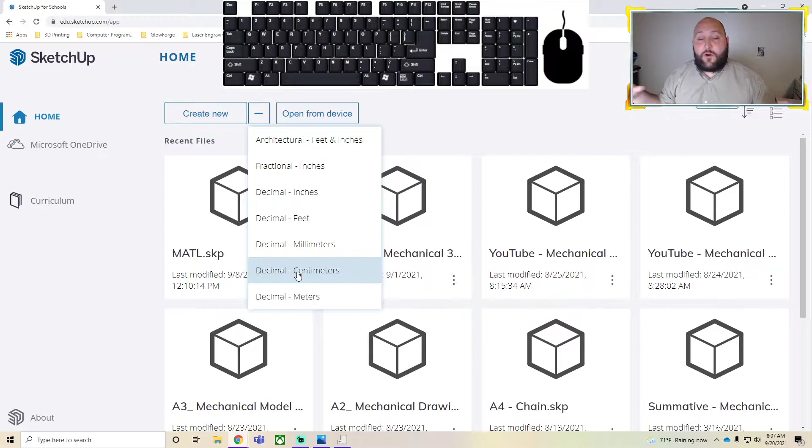All right, so if you make your way over to Google SketchUp, we're gonna go ahead and create new. For this one, again, I wanna use centimeters, just because on that object, the numbers are kind of big. If it was inches, 50 inches is 4 feet and something. So we don't want our part to be 4 foot big. So we're going to use centimeters on this. So click the little drop down here and then go to centimeters.

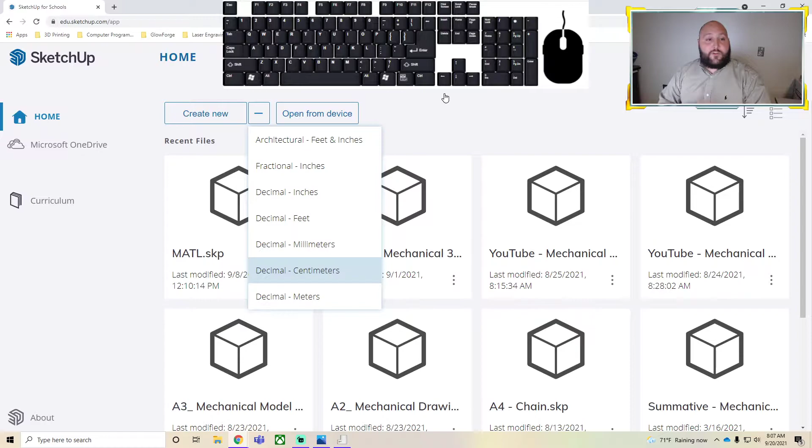Again, the link to Google SketchUp for Schools is on the It's Learning page. So you're going to click decimal centimeters. I also added a keyboard. That way y'all can see my button presses that I am doing and how I'm typing. Maybe that will help also.

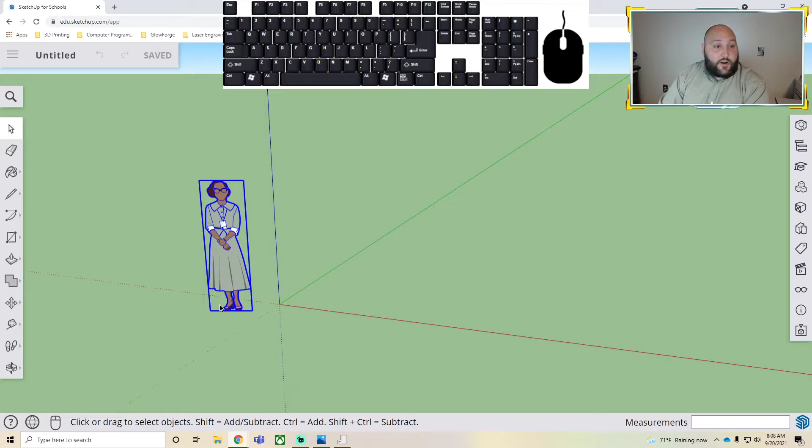All right, so they no longer have Temple Grandin. I haven't researched to see who this is yet, but we have a new avatar in the middle. So I'm going to go ahead and click on her and click delete. All right, so that way I have a nice work area here. First things first, you always want to save. So I'm going to go up and click Untitled, then go into my OneDrive,

and I'm going to call this YouTube SketchUp number 2, and this is our locating guide. YouTube SketchUp number 2 locating guide. All right, so now that it's saved, sometimes you'll get an error, guys. Just keep clicking save. It'll update in the cloud. All right. So we're going to take a look here.

So which way do we want to start? When we did the last one, we started with the rectangle bottom. But the thing that's different here is we do have a rectangle, but we also have this arched edge on the right side. So I'm going to start by drawing the rectangle first, and then I'm going to add that arch second. So rectangle first, arch second.

So I look here and I see that my rectangle is 65 long. And then how far across is it? Well, I know that the diameter of this circle is 25, but I also know that the radius of this big arch is 25. So I know that this is 50 across. So I need a rectangle that is 65 by 50. All right, so I'm going to come in here and I'm going to grab the rectangle tool.

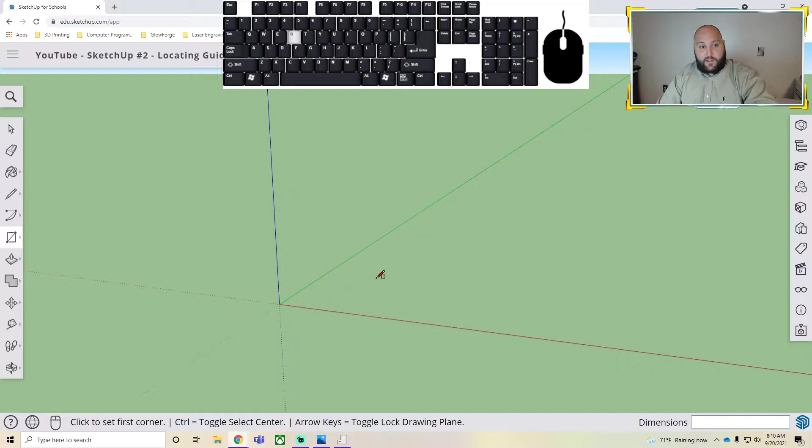The reason I'm including the keyboard is I'm going to teach you hotkeys today. So if I press R, you will see that now it's gone to the rectangle tool. Again, watch. I'm on my pointer. If I press R on the keyboard, I now have the rectangle tool. So I'm going to start by just drawing, and I want it to be 65, comma 50. Enter. And there's my rectangle.

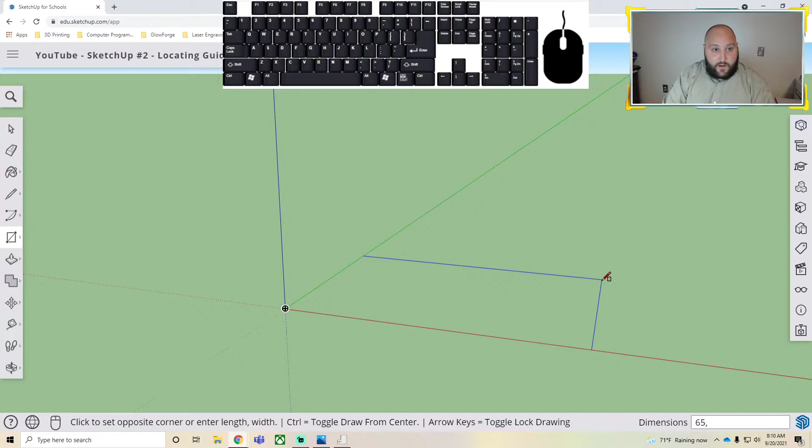So again, I start drawing the rectangle. I type in 65, comma 50. Enter, and I've got my rectangle. If you're not using a mouse, you'll have to go down here and grab your zoom tool.

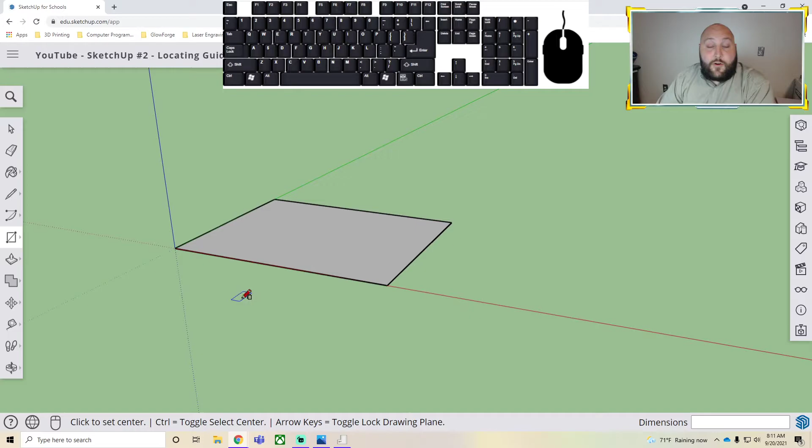All right, I like to use this zoom tool. Ooh. All right, but again, I have a mouse. So with the mouse, I can click, I can rotate, I can zoom. So if you don't have a mouse, you're gonna have to use these tools down here.

All right, so like I told you in the last video, as we work, I want you to dimension. So let's just double check. Okay, yeah, we got 65 by 50. What this will do is as you're working, you won't have these moments where you're like, okay, that's not what I wanted, because you're double checking yourself all the way through.

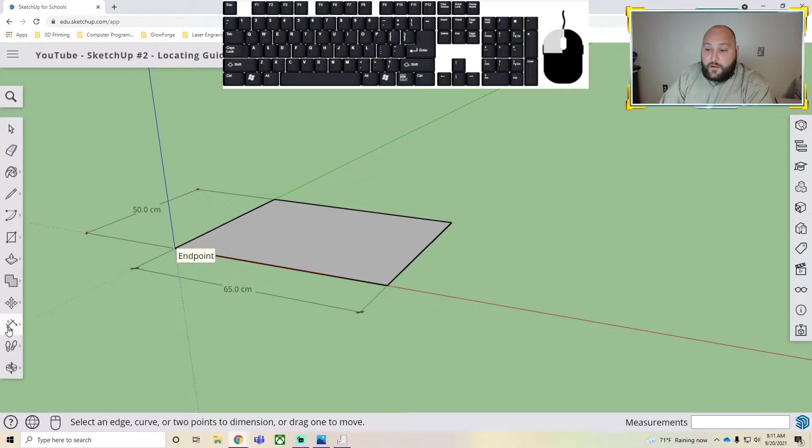All right, so next thing we want to do is add this arch here. So if I go back to my drawing, that arch is a 25 radius. So I need to find the middle and then create a circle that is 25. So I'm going to grab my tape measure tool to find the middle. Again, if I press T on the keyboard, T gives me the tape measure. Watch, T, tape measure tool.

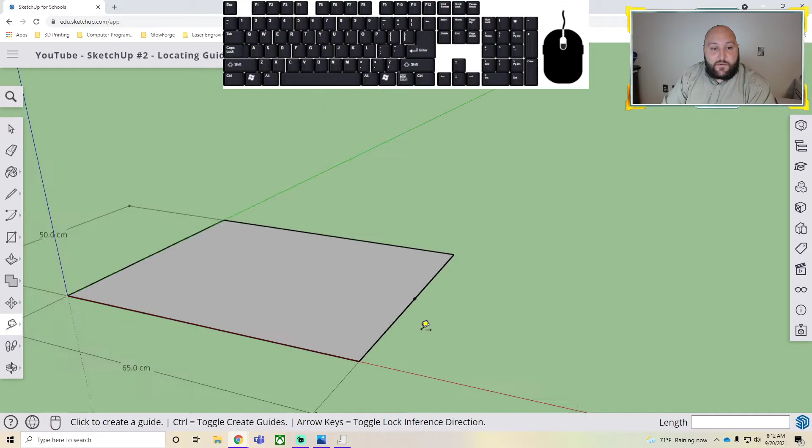You're going to click a corner and start going out. Okay, half of 50 is 25, so I'm going to click 25, enter. And now I have this little guide point right here at 25. So I'm going to use that guide point to create a circle. If you want to take a guess, what is the hotkey for circle? It is C. So now I've got my circle tool. I'm going to click on that midpoint I created, and I'm going to pull it out to the edge. And that's going to create our arc we need.

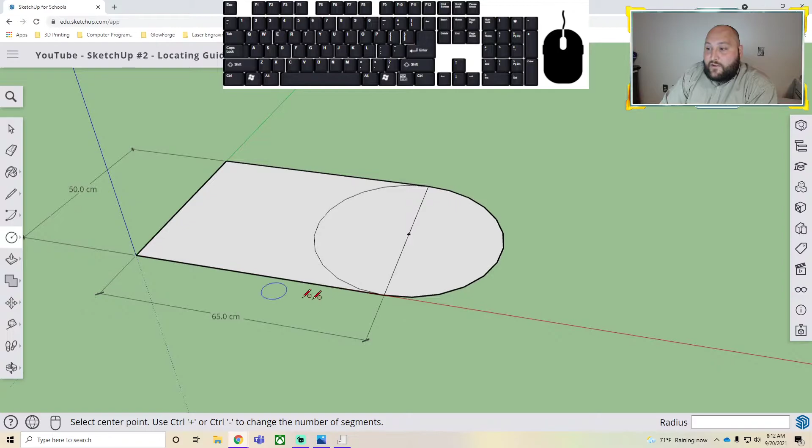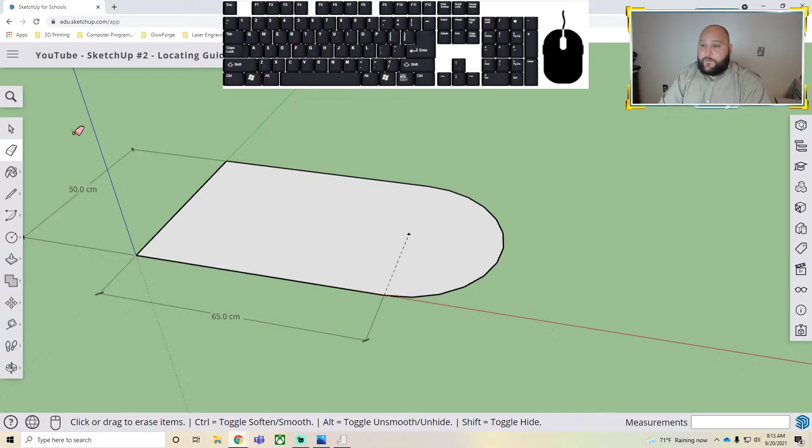I'm going to grab my eraser tool. So E, right? Probably E. I tapped E on the keyboard. Got my eraser tool, and I'm going to delete this line and this line. I'm going to leave that midpoint because we need to draw a circle and cut it later. So you actually have two ways to do this. You can draw the circle in now before you push pull, or you can draw it in later. It's really up to you.

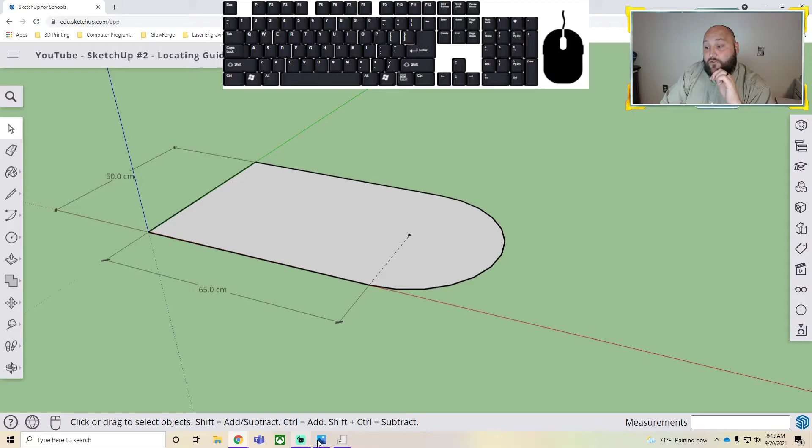All right, so what I'm going to do now is I'm going to go back and take a look at our drawing here. On our drawing, I think I'm going to go ahead and draw in that circle. So the diameter of that circle is 25, but SketchUp wants us to include the radius. So the radius is 12.5. Even though our diameter is 25, the radius is 12.5.

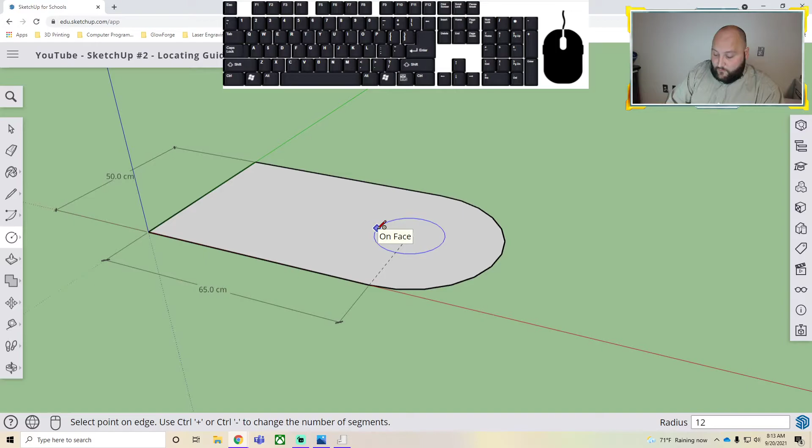So I'm going to take our circle tool, and I'm going to click that midpoint and see it at the bottom right there. You'll see that it says radius. So I'm going to type 12.5, enter. And that gave us a diameter of 25 because our radius was 12.5.

So how can I double check myself? I grab the dimension tool. I click it, diameter 25. That's what we wanted. Radius of this one should have been 25. All right, so everything's looking good here. So I'm going to go ahead and take my push-pull tool and add material, add depth to this model.

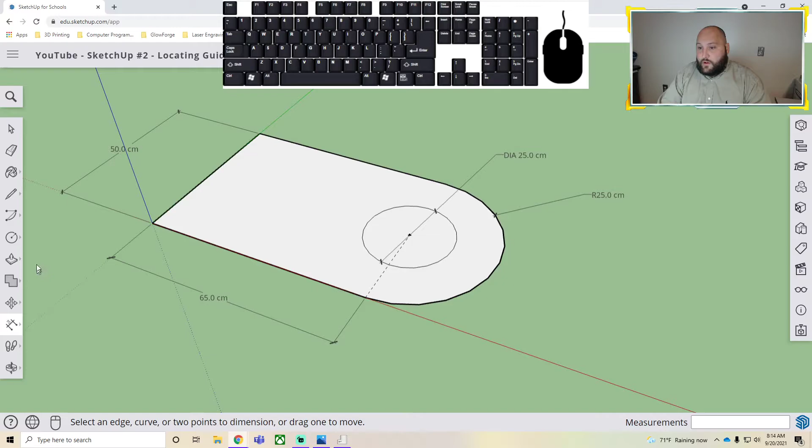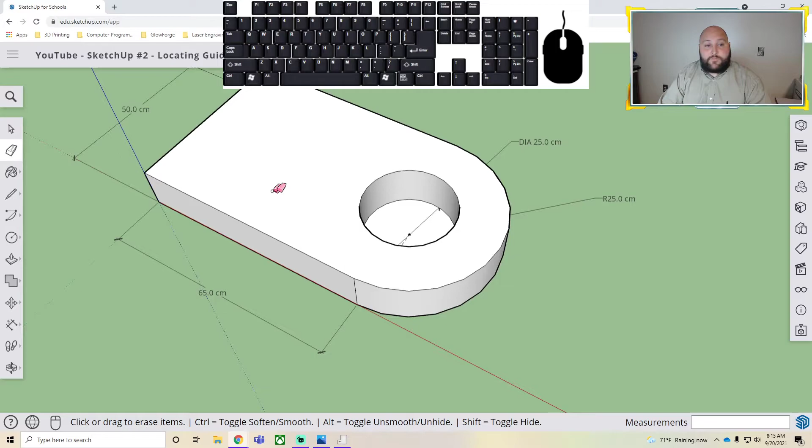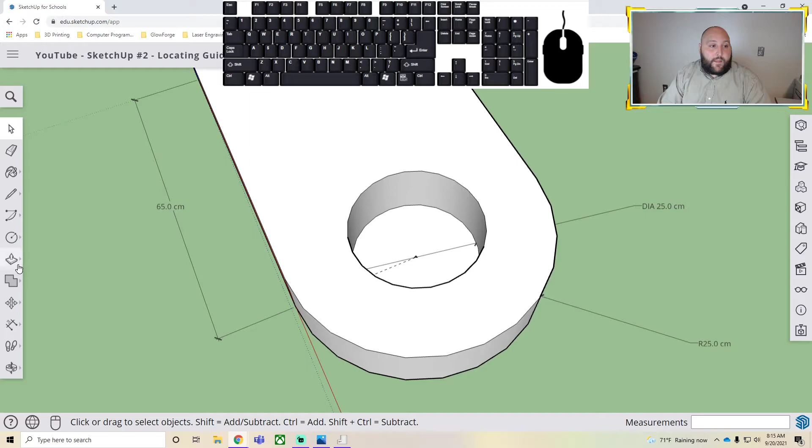So I'm going to just take my eraser tool now, and I'm going to go in here, and I'm going to, well, that wasn't good. Maybe I'm going to click from the bottom. Huh. Oh, SketchUp, you give me issues sometimes. All right, so I'll tell you what we're going to do. We're going to take our push-pull tool now, and we're going to push this up.

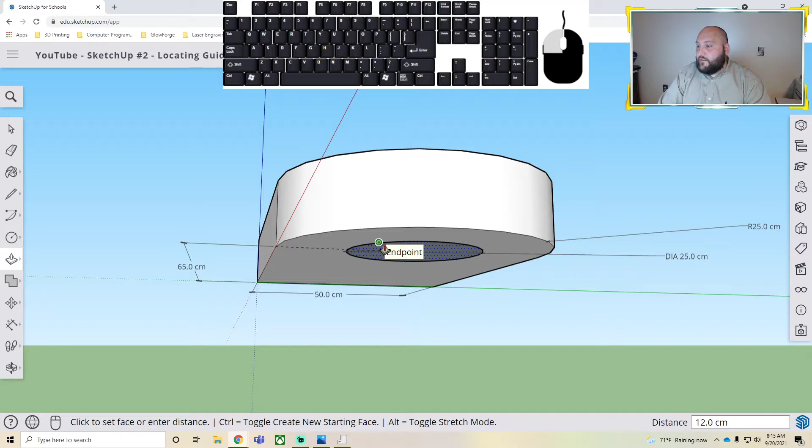See, that's why sometimes I don't like to draw in cuts early, because then you're left with weird stuff like this. All right, we're going to take a step back. Let's go ahead and delete this. Go ahead and delete that.

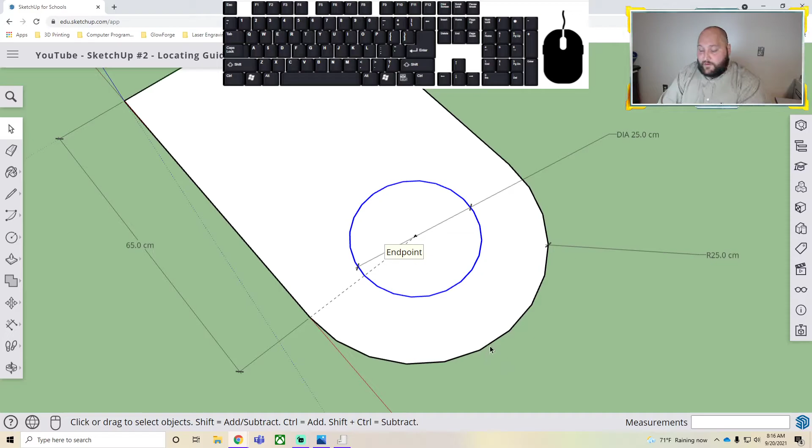Sorry guys, SketchUp is not being my friend right now.

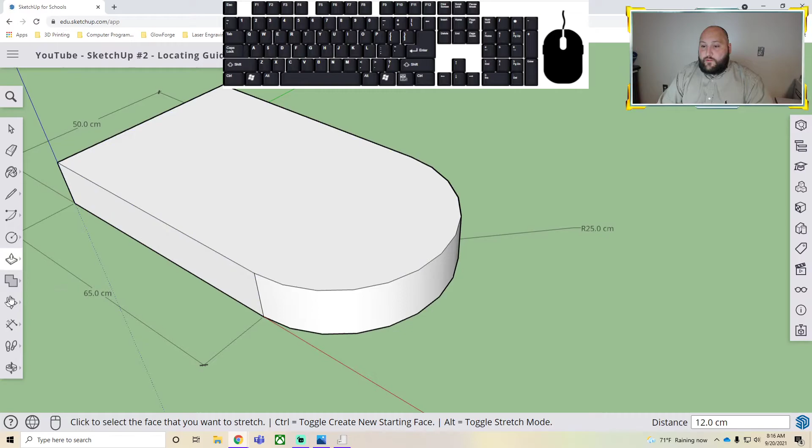All right, so we're going to delete that. I'm going to go ahead and delete this dimension over here. What we're going to do is pull this up, 1, 2, enter, 12 again. So we're going to pull it up 12. If you look here at our drawing, we pulled it up 12. So now we're going to go back and grab our tape measure tool. The hotkey is T. I'm going to click and go in 25.

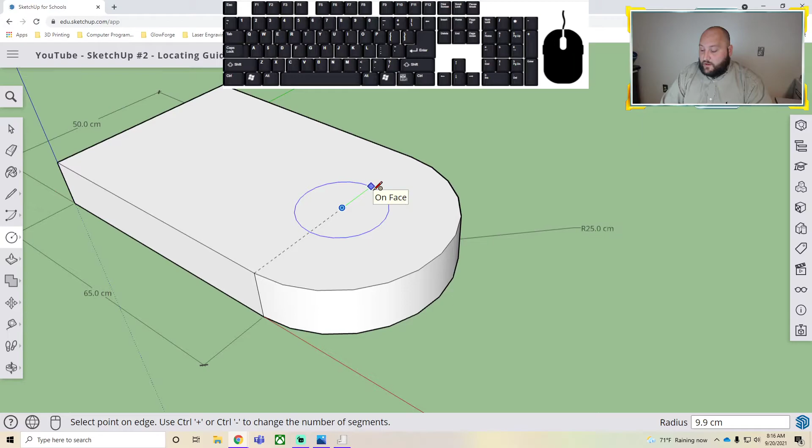All right, now I'm going to go draw that circle. Again, hotkey for circle, guys, is C. I'm going to draw in that circle. I'm going to type the radius is 12.5 because we want the diameter to be 25. And now I'm going to do a push cut. I tried to do too many things at once earlier and it didn't work out. So I'm going to press P on the keyboard to get my push pull, and then I'm going to push pull this down.

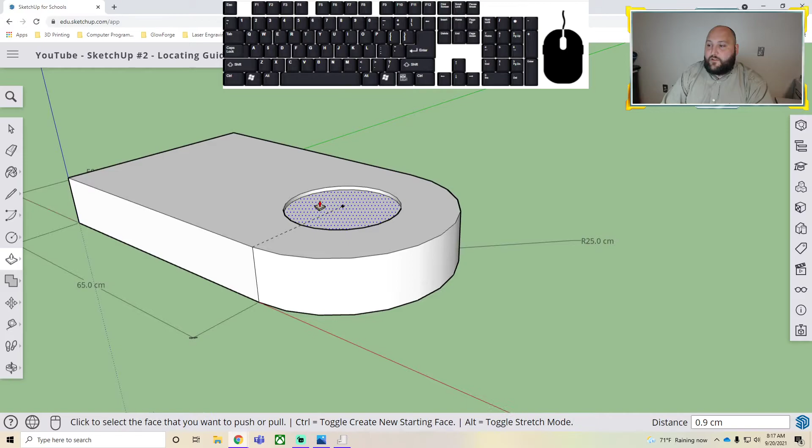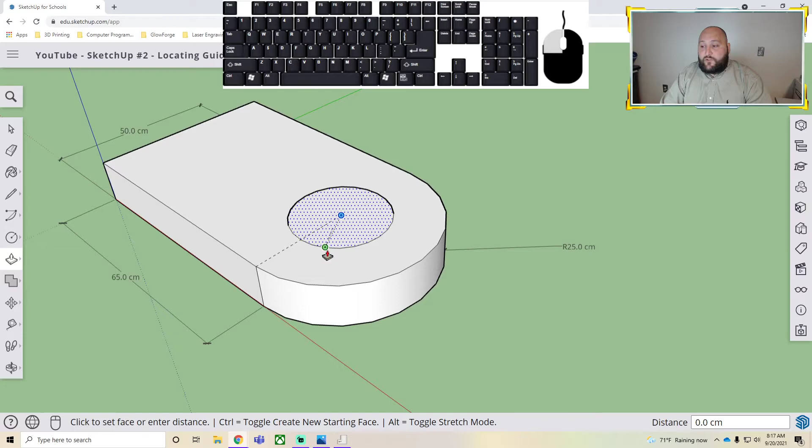So notice how I'm doing this. I'm clicking the circle and I'm moving it down until I hover over this bottom edge. You see how it snapped to that green endpoint? So what you're telling it to do is push down to that point, and then when I let go, it does what's called a push cut. So I'm pushing down until I get to the bottom of my object right here, and it's going to snap to that green point, and then if I let go, it cuts it.

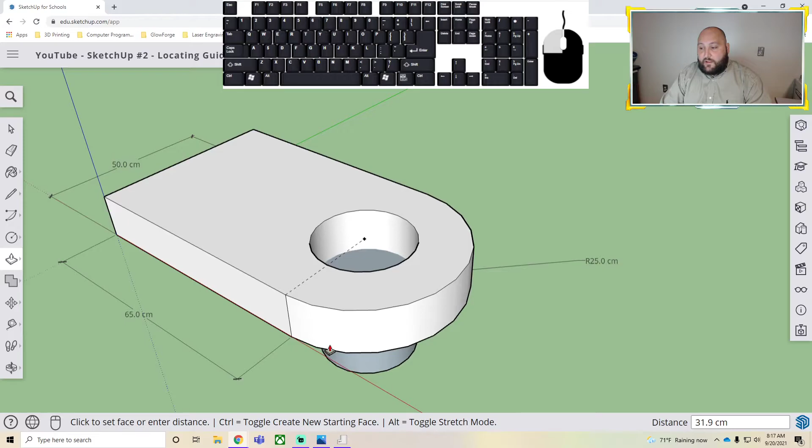So again, one more time, I push down till I hover over that edge. I can get the midpoint or I can get the green point. I just need one of these edges, and then it'll do a push cut. So at this point, I just need to quickly dimension. I'm going to grab the dimension tool and demonstrate that that's 25. And then I also need to demonstrate that that is 12 high using my dimensions.

Okay. So at this point, we just need to add our little rectangle back here. If we take a look, the only thing we're missing is this little rectangle. So I need the length and width of that rectangle. It is a 12 by 30. And actually the keyboard is in the way here, so I'm going to pull it down for a second. So you can see that it's 12 wide by 30 long. So we're going to go back to our SketchUp.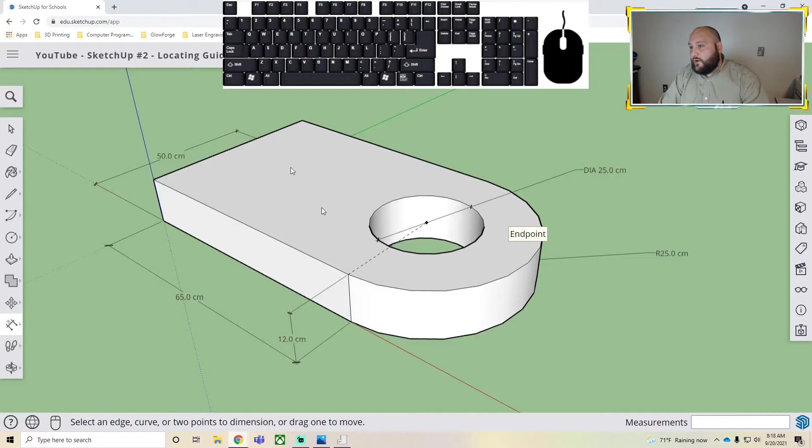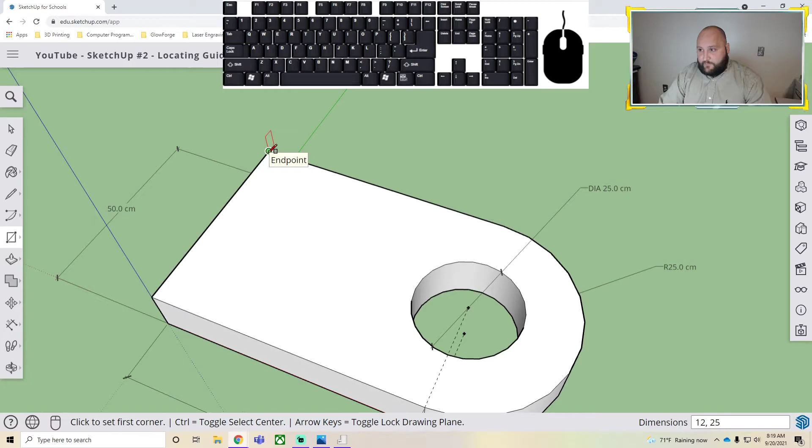I'm going to grab my rectangle tool by pressing R on the keyboard. I'm going to click on this corner, pull down, and type 12, 25, enter. Oh, it went the wrong way, so that means I need to reverse my dimensions. So I'm going to click again. So I need 25, 12, and that way it'll go the right way. But I actually needed 30. I looked at that value wrong. It's actually 30 here, so 12 by 30.

Sorry again, guys, I'm waking up this morning.

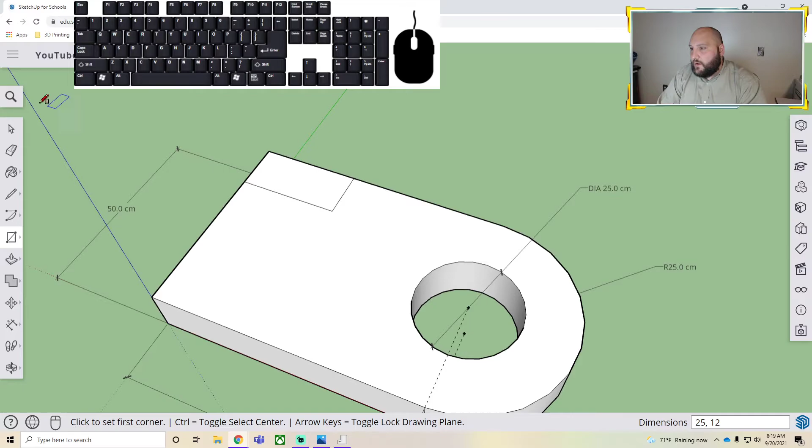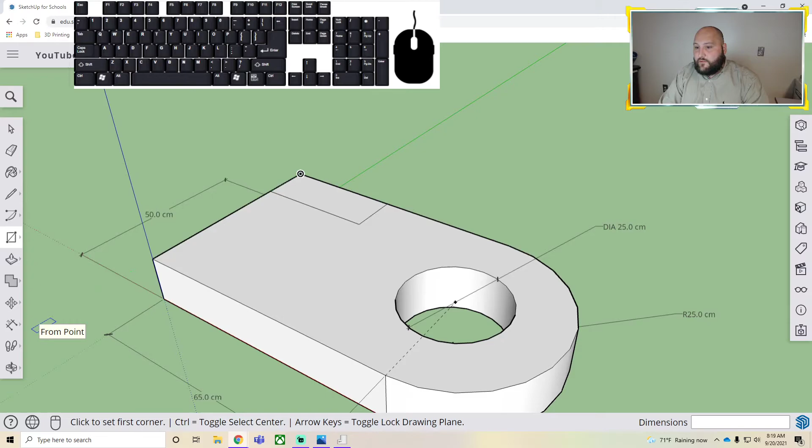All right, so again, I'm going to click that corner. I'm going to type 30, 12. And that is our rectangle there. So how high do I need to go? Well, we need to go 25 high. So I'm going to grab my push-pull or press P on the keyboard, pull it up, and type 25, enter. Now I just need to finish dimensioning, so I grab the dimension tool, and I want to double check that that is 30.

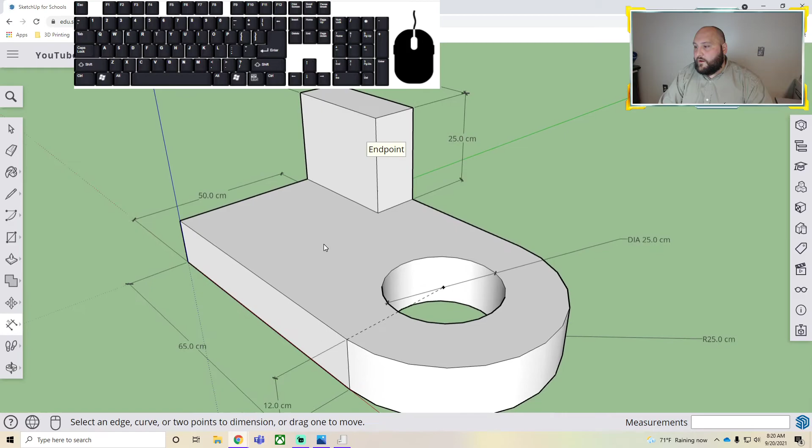I'm going to do it again. 30. This should be 25. And back here, we should have a 12. All right. And at this point, this looks a lot like this. This looks a lot like this. So we know that we have done it correct because all of our dimensions match.

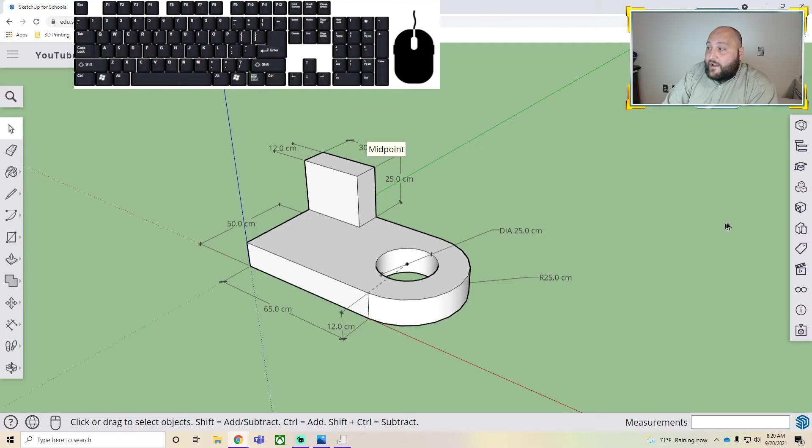Okay. So again, if you want to add appearance, you don't have to, but if you would like to add appearance, come over here to the right. You're going to click on this little cube that has the checkered on one side, then you're going to go into search and you can pick whatever material you want. In my case, I think I want this thing to be wood.

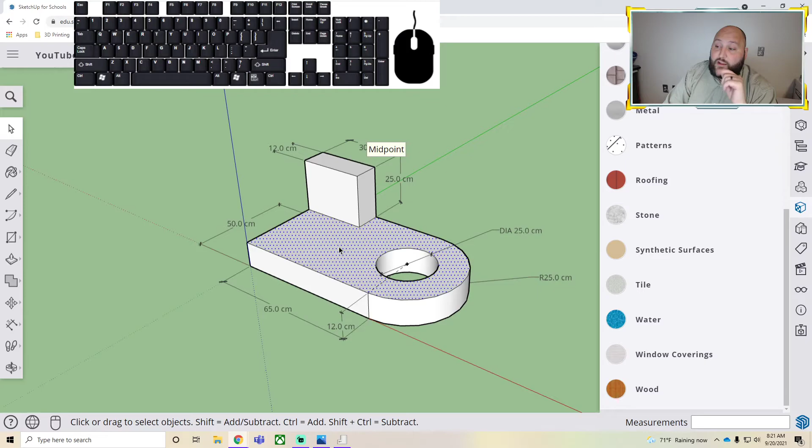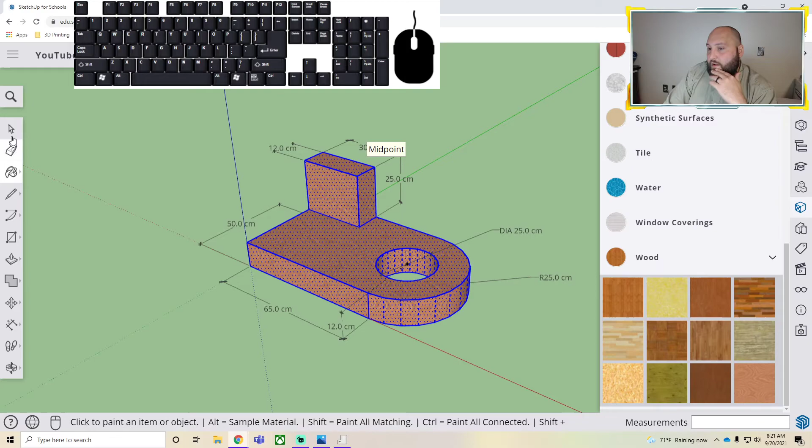All right, so let me show you something. If you click, it'll click a surface. If you double click, it'll do a surface and the outline of that surface. If you triple click, it does the whole object. So if I want to paint the whole object in one click, I can triple click, go over here to wood. I'm filling this. All right, and there we go. So I've painted my whole object using a triple click and then a paint.

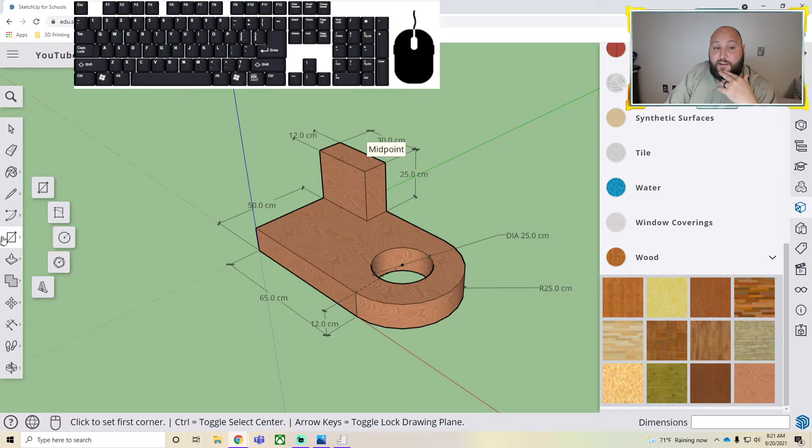All right, very last thing, guys, I've given you the grade breakdown. I believe this is worth 10 points, putting your name on this. So you're going to go in here and find 3D text. It's inside of a rectangle, click on this A. You're going to type your name. So I'm Mr. Smith. You can pick whatever font you want. Today I'm going to do Oswald. I might even make it bold.

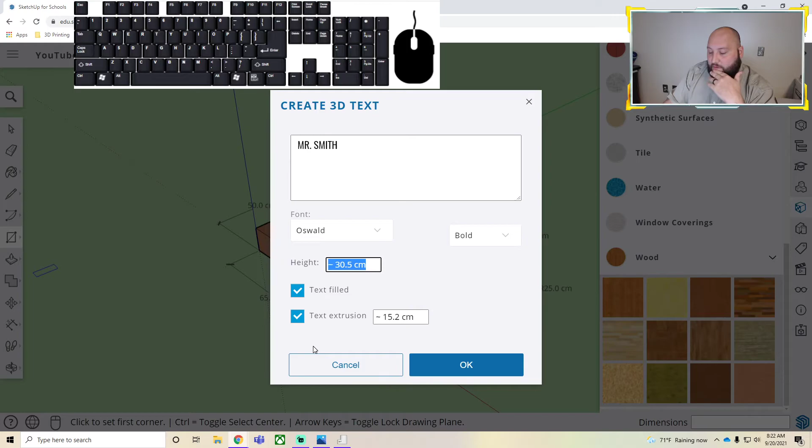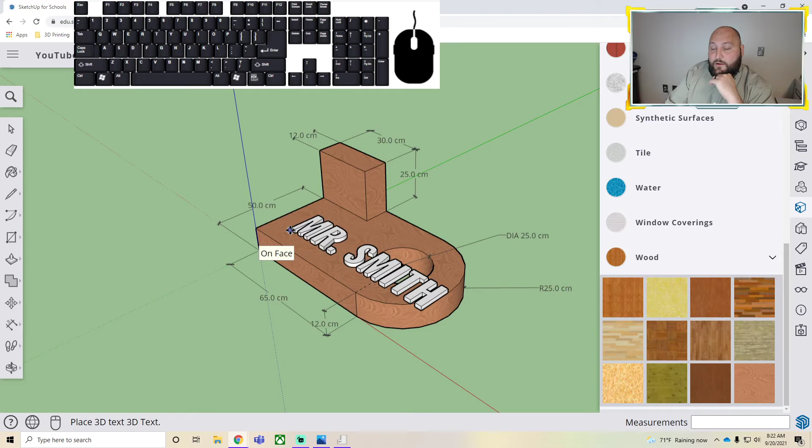For the height, we know that back piece back there is 25 high. So maybe I make my height like 15. Extrusion is how far out the letters come. You don't want this to be a huge number, so I'm going to try 2. Then I'm going to click OK. So that height actually made mine really big. So I could try to place it somewhere on the side maybe, or if I want it to be on the back, I'm going to go ahead and click and put it on the back.

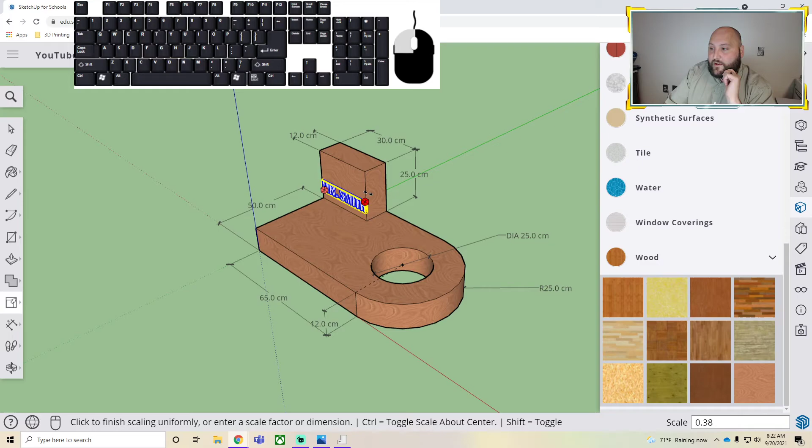If you go over here to where your move tool is and click, there's a tool down here called scale. If I click that, it'll allow me to grab one of these green blocks here, and then I can go back and grab my move tool and move this to where I want it. Oh, I say that. Let me try that again. Okay, maybe that's how I want it.

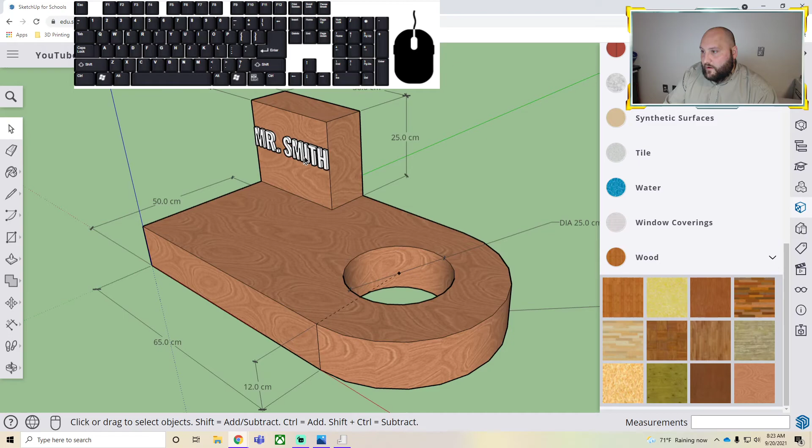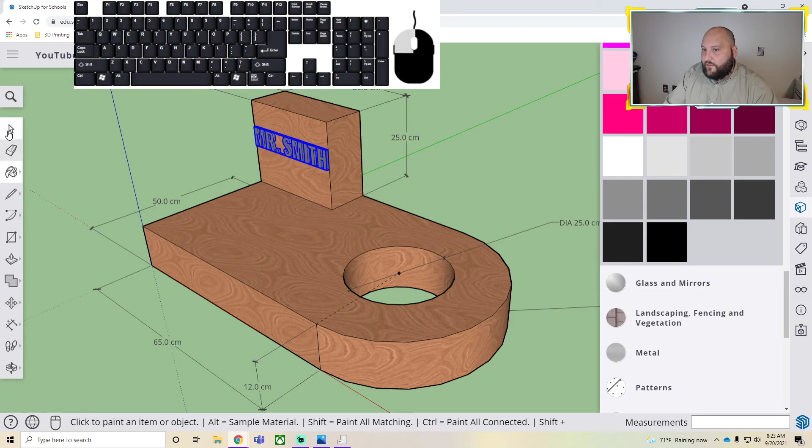And you know what? I kind of like the way it looks in silver, but I might paint it. Let me go into my colors, see what red looks like. That's a little much. What about dark blue? No, I'm not feeling that either. Sometimes the gray is just the best. There we go, I like that. So there you go, there's my piece with all my dimensions. So I have the model, I have correct dimensions, and I have my name. That's what I'm looking for when I go to grade these.

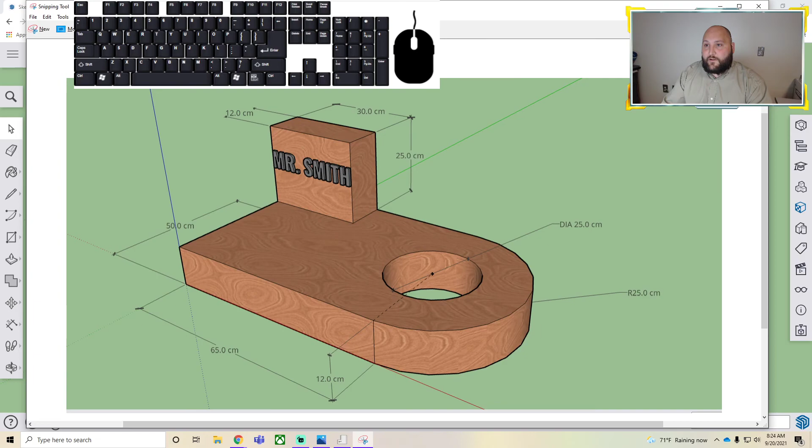At that point, you just need to take a screenshot. Let's see if my snipping tool works today. It does. Sweet. So if you open up snipping tool, you can click new, and then it'll allow you to draw a rectangle around it. Make sure you get all your dimensions. And then you can just go to File, Save As. And I'm going to call mine SketchUp number 2, and this is Locating Guide.

And this is what, if I am the student, I am submitting as my grade. So I have the 3D model with my name on it, all the dimensions. I've taken a screenshot, and then I am submitting this, and I will be grading them. So that's it for SketchUp number 2. I'm going to make another video for SketchUp number 3, which will be the tool post slide that we did when we did our orthographic drawings.